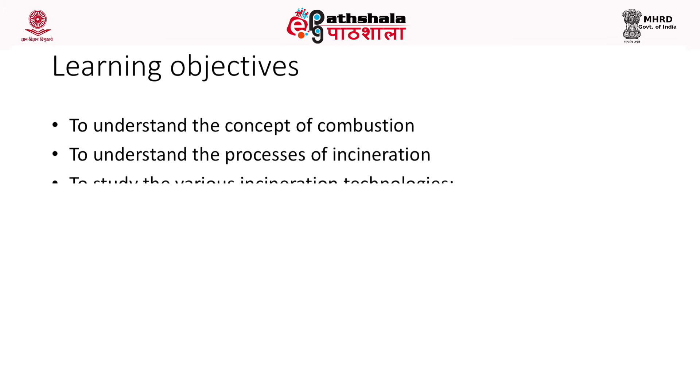So the learning objectives of this module include: first, to understand the concept of combustion, then to understand the process of incineration, to study the various incineration technologies, and finally we'll end up by studying the various advantages, disadvantages and applicability of incineration. Finally, we will also estimate the energy generation potential of various wastes.

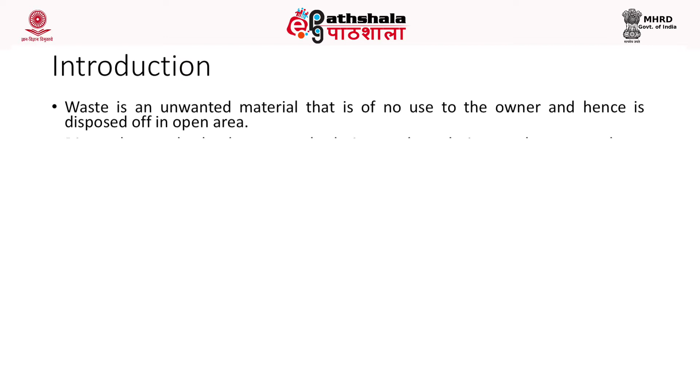Now, as I told you earlier, waste is an unwanted material that is of no use to the owner and hence is disposed of in an open area. Disposal into land or water bodies is just not a solution; it creates a huge problem for the environment, thereby ending up in a lot of environmental and health hazards. The polluter pays principle, which is proposed in the Environmental Protection Act, is for environmental protection, and this acts as a force for industries to treat the waste prior to disposal.

Thermal treatment is one option which uses a very high temperature to degrade or destroy the waste. They are designed to thermally degrade the waste and recover energy in the form of heat or electricity. Its main purpose is to reduce the impact of residual waste on the environment.

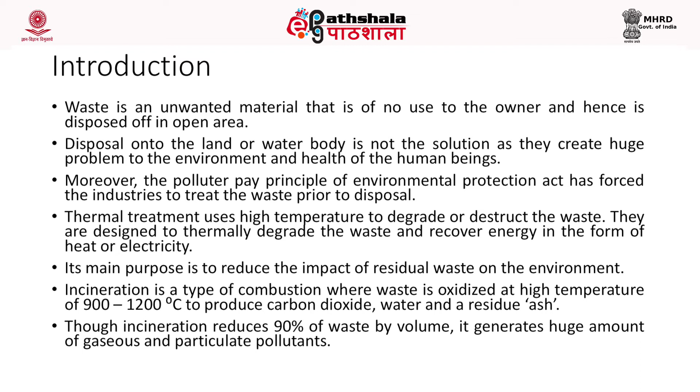So as I told you earlier, incineration is a type of combustion where the waste is oxidized in the presence of oxygen and a high temperature of around 900 to 1200 degrees Celsius, resulting in the production of carbon dioxide and water and a residue called ash. Though the incineration process reduces 90% of waste by volume, it generates a huge amount of gaseous and particulate pollutants. Now let's look into combustion and then we will study incineration.

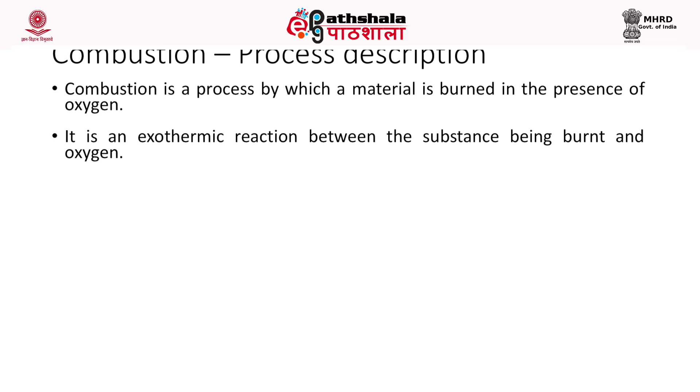Now what is combustion? Combustion is a process by which the material is burnt in the presence of oxygen. It is an exothermic reaction between the substance being burnt and oxygen. Combustion breaks down organic and inorganic substances into stable end products, carbon dioxide and water. The reactions occur between carbon and hydrogen and the oxygen present in air to form carbon dioxide and water.

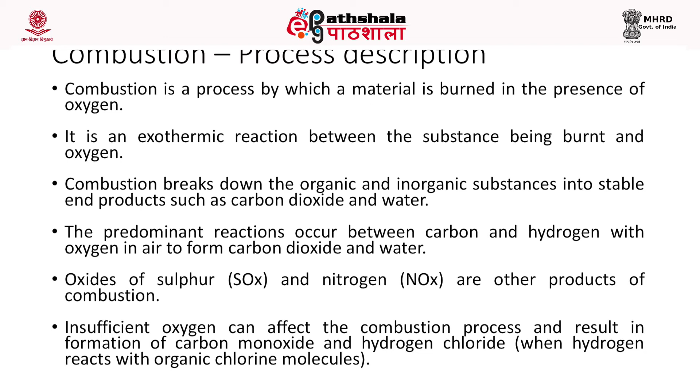In addition to carbon dioxide and water, oxides of sulfur and oxides of nitrogen are also released during this process. Insufficient oxygen can affect the combustion process and might result in the release of carbon monoxide, which is a very dangerous gas. As you all know, carbon monoxide combines with the hemoglobin of your blood and reduces the oxygen carrying capacity of blood, which can be fatal. Carbon monoxide is harmful, and hence to avoid its formation, you have to flush a sufficient amount of oxygen into the chamber.

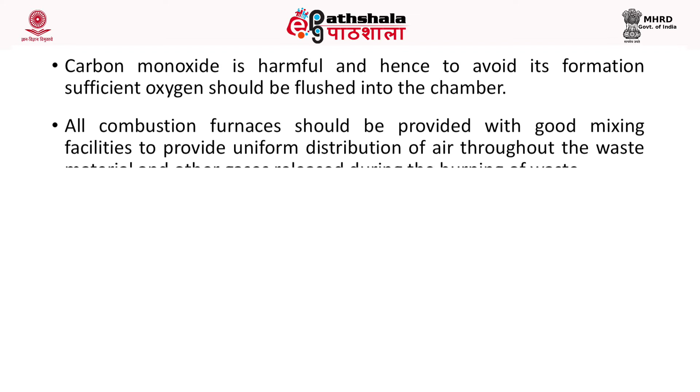All combustion furnaces should be provided with good mixing facilities to provide uniform distribution of air throughout the waste material and other gases released during the burning of waste.

At the end of combustion process, an incombustible particulate matter called bottom ash is left in the combustion chamber or the incinerator. Some amount of particulate matter is also emitted through the chimneys and this is termed as fly ash. So the particulate matter which is emitted outside the chamber along with the flue gas is termed as fly ash.

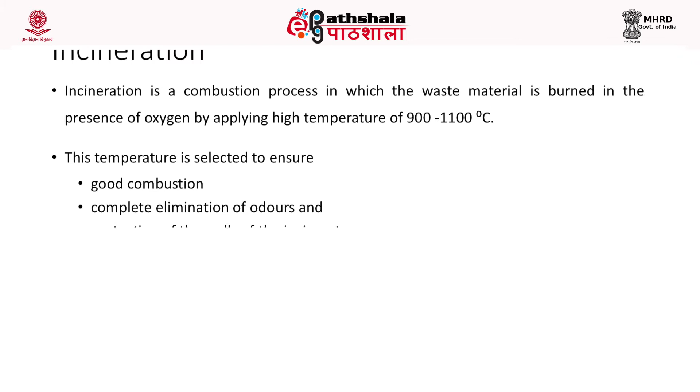Now incineration process is one of the best examples of combustion. As I told you earlier, incineration is a combustion process where the waste is burnt in the presence of oxygen at a very high temperature of about 900 to 1100 degrees Celsius. This temperature is selected, one, to ensure a good combustion, second, to eliminate the odor problems, and third, to protect the walls of the incinerator.

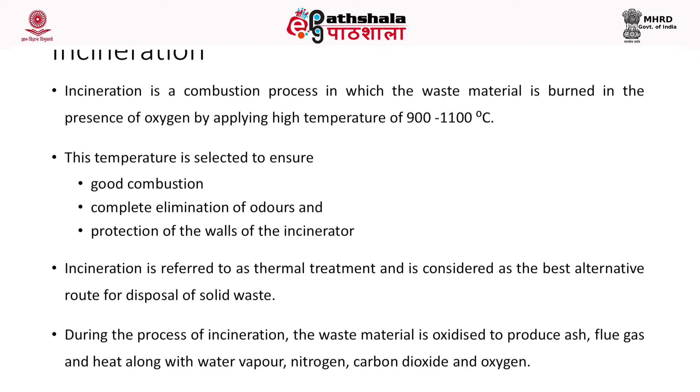Incineration is termed as a thermal treatment and is considered as a best alternative route for disposal of solid waste. During the process of incineration, the waste material is oxidized to produce ash, flue gas and heat along with water vapor, nitrogen, carbon dioxide and oxygen. In addition to carbon dioxide, other gases like carbon monoxide, hydrogen chloride, hydrogen fluoride, nitrogen oxides, oxides of sulfur, volatile organic carbon, dioxins, furans, PCBs are also produced depending upon the nature of waste and the availability of oxygen.

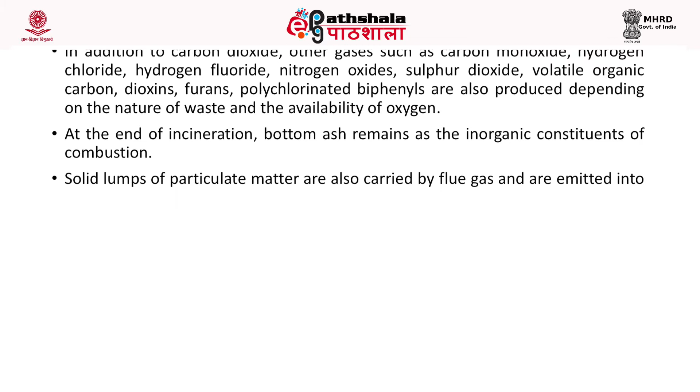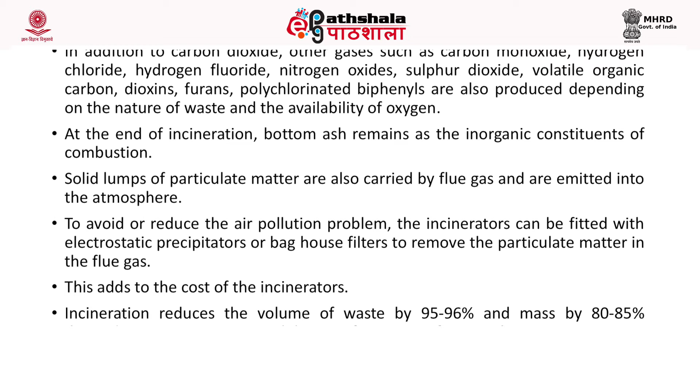At the end of incineration, bottom ash remains as the inorganic constituent of combustion. The solid lumps of particulate matter are also carried by flue gas and let out, which is called fly ash. In general, to avoid the emission of these particulate matter, that is the fly ash emissions, it is essential for a particular user to install an air pollution control device such as an electrostatic precipitator to remove these particulate matter so that they will not be released outside into the environment.

So, to avoid or reduce the air pollution problem, the incinerator can be fitted with electrostatic precipitators or baghouse filters to remove the particulate matter in the flue gas. And this adds to the cost of the incineration process. Incineration reduces the volume of waste by 95 to 96% and by mass it reduces by 80 to 85% depending upon the composition and the degree of recovery of materials.

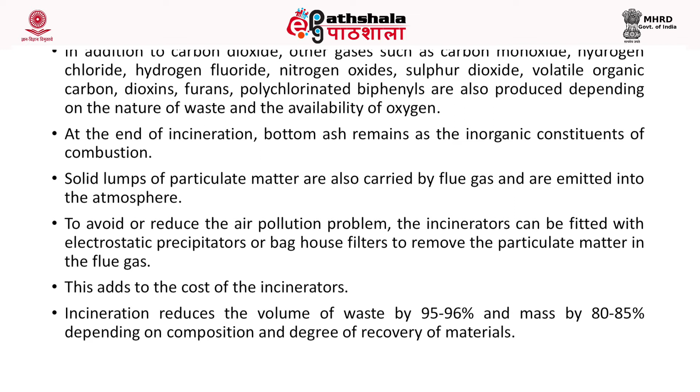At this high temperature, it also possesses an advantage of killing the pathogens. The pathogens and harmful organisms are killed during incineration and hence it is used for treating biomedical or clinical waste. Incineration process also removes harmful toxins. In recent times, modern incinerators are also used to recover energy from the heat generated during this combustion process.

Now, this energy can be used and converted into electricity. Since this advantage is associated with incinerators, they are categorized under systems where wealth can be recovered from waste. They are also called waste to energy processes. The heat that is generated from these incinerators is converted into electricity using steam turbines.

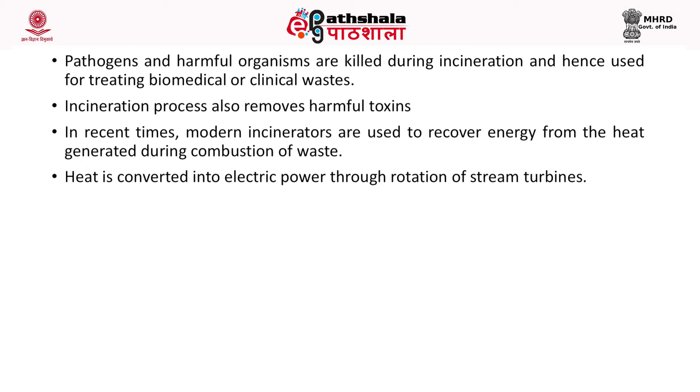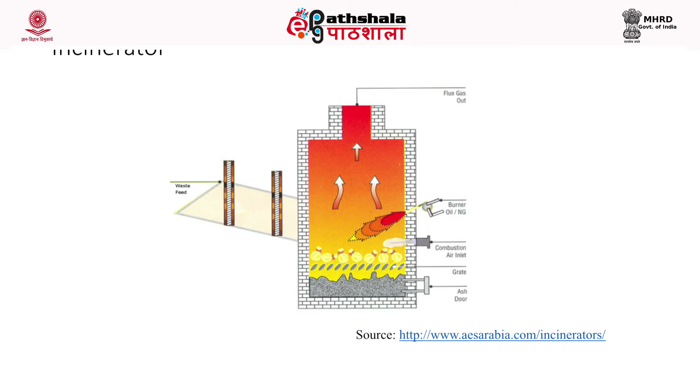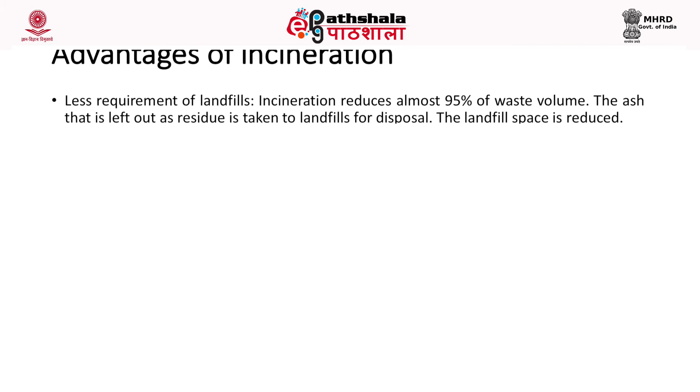Now what are the advantages of the incineration process? First, incineration requires less space in landfills. As incineration reduces almost 95% of waste volume, the ash that is left out as residue is taken to landfills for disposal. This reduces its space in the landfill.

Second, incineration can be carried out near the point of waste collection. That means at the source of generation itself, you can install an incinerator and continue with the process, because they are considered compact units. So incinerators are compact units and hence can be set up at the source of waste generation or in transfer stations. They can be used as decentralized systems.

Incineration results in substantial reduction of weight by up to 75% and by volume 90%. Also, it makes the product sterile. Waste is reduced into a biologically sterile ash product. At high temperatures of about 900 to 1100 degrees Celsius, the pathogens and other harmful organisms present in the waste are killed, and hence they are sterilized. The residue, that is the ash left after incineration, is hence termed as biologically stable.

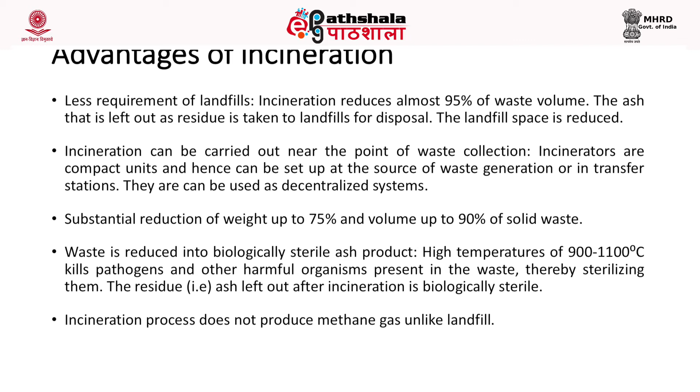The incineration process does not produce methane gas, unlike the landfills. As I mentioned earlier, it is also termed as a waste to energy process. The waste incineration can be a source of low cost energy to produce steam for electric power generation, industrial process heating, or hot water for district heating, thereby conserving primary fuel resource.

The bottom ash residue is considered as non-injurious and it can be used as a material recovery or as secondary aggregates in construction. It is the best practical environmental option for many of the hazardous waste like the highly flammable waste, volatile, toxic and infectious waste.

Now the disadvantages. First, the main disadvantage of the incineration process is the emissions from these incinerators. During the process of incineration, a lot of gases are being generated. These gases such as carbon dioxide, carbon monoxide, oxides of sulfur, and oxides of nitrogen are commonly emitted during the process of oxidation. They are serious air pollutants.

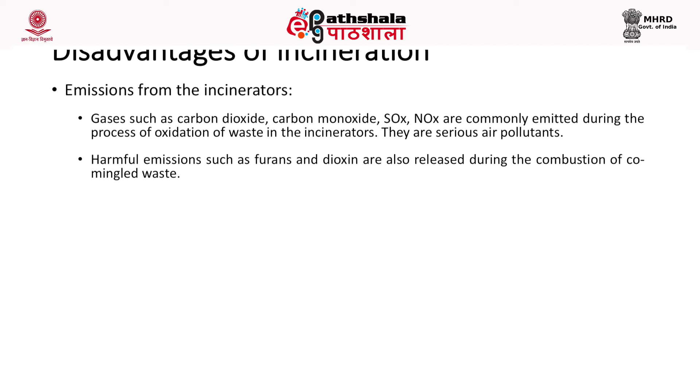Harmful emissions such as furans and dioxins are also released when you burn the commingled municipal waste. The fly ash also contributes to particulate air pollution. These air pollutants endanger human health and also the environment, and hence they require air pollution control devices.

So when you inhale this particulate matter, it can deposit in your respiratory system and it can lead to various breathing and respiratory problems. So that is a problem with this particulate matter, and the gases, as you all know, have some health effects. In addition to that, it also leads to a lot of environmental problems.

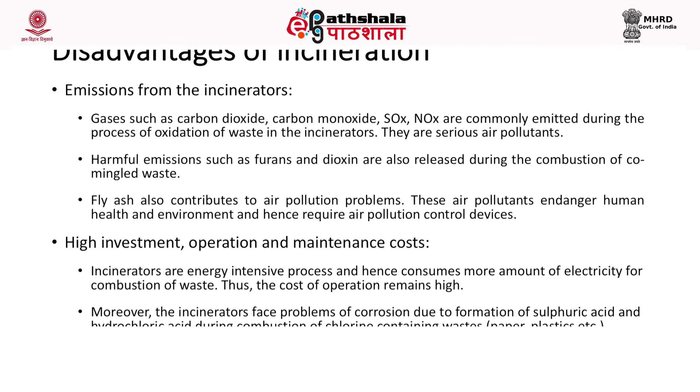The second disadvantage is that it involves a high investment, operation and maintenance cost. As incineration involves very high energy, that means a temperature range of around 900 to 1100 degrees Celsius, they are considered as energy intensive processes, and hence they consume more electricity for burning the waste. Thus, the cost of operation remains high.

Moreover, the incinerators face problems of corrosion due to formation of sulfuric acid and hydrochloric acid during combustion. The emission pipes too get abraded due to the deposition of particulate matter, which becomes hard. These factors increase the cost of maintenance of these incinerators. A high capital investment cost is also involved for constructing these incinerators.

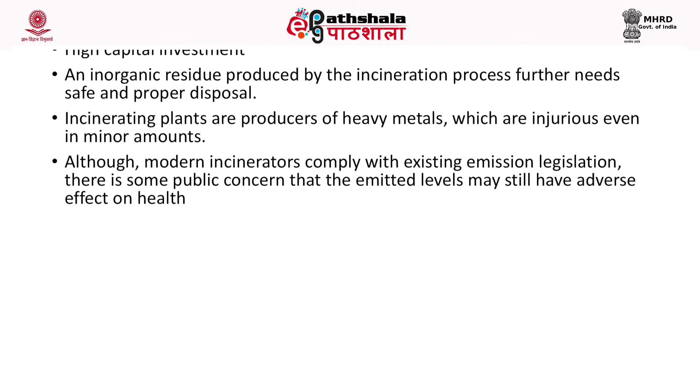An inorganic residue produced by the incineration process further needs safe and proper disposal. The incineration plants are producers of a lot of heavy metals which are injurious even in minor amounts. Although modern incinerators comply with the existing legislation or laws, there is some public concern that the emitted levels may still have adverse effects on health.

Incineration is designed on the basis of a certain calorific value of waste. Removal of materials like paper and plastics for recycling may reduce the overall calorific value and may affect the incinerator performance. Local communities have always opposed the presence of these incinerators in their locality due to the problems associated with the gaseous and particulate emissions. They also require skilled operators, which will again add to the operation cost.

Now, when can this incineration process be applied? Incineration can be applied only if the following criteria are fulfilled. First, it can be used in places where waste management has been practiced for a number of years. Second, at least 50,000 metric tons of waste should be available per year. Also, you should take care of the calorific value of waste, because it is very important to achieve efficient incineration.

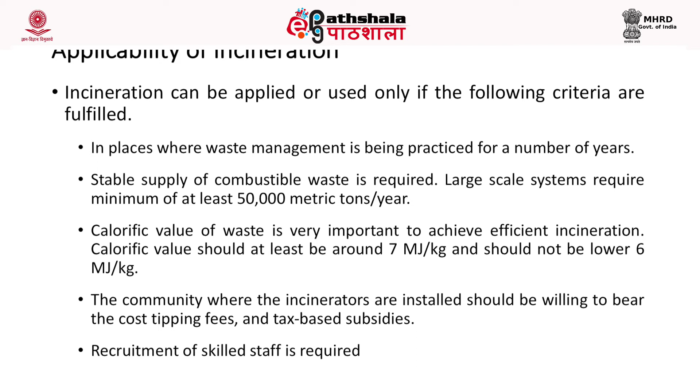The calorific value should be at least 7 megajoules per kg, and it should not be lower than 6 megajoules per kg. The community where the incinerators are installed should be willing to bear the cost, tipping fees and the tax-based subsidies. The recruitment of skilled staff is also required if you have to go for an incinerator as an option.

Now, let's look into the various systems which are available for the incineration process. An incinerator is designed to maximize the combustion efficiency of waste and heat output. It should focus on minimizing emissions by balancing the oxygen and time, temperature and turbulence. The 3 T's, that is time, temperature and turbulence, should be maintained throughout the process. On the basis of the capacity, nature of waste to be combusted and the type of system, incinerators are classified into the following types.

The mass burn incinerator, modular incinerator, fluidized incinerator, starved air incinerator, refuse derived fuel and rotary kiln incinerators.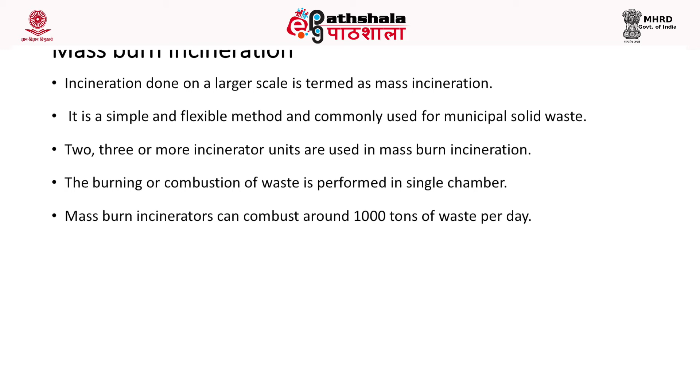Mass burn incineration: incineration done on a large scale is termed mass incineration. It is a simple and flexible method, most commonly used for municipal solid waste. Around 2 to 3 or more incinerator units are used, and the combustion of waste is performed in a single chamber that can combust around 1000 tons of waste per day.

The process goes like this: the pre-processed, segregated waste is brought through trucks to the tipping floor. After the waste is tipped onto the floor, it is pushed into the pit by a bulldozer, then fed into the incineration chamber through a chute and grate system.

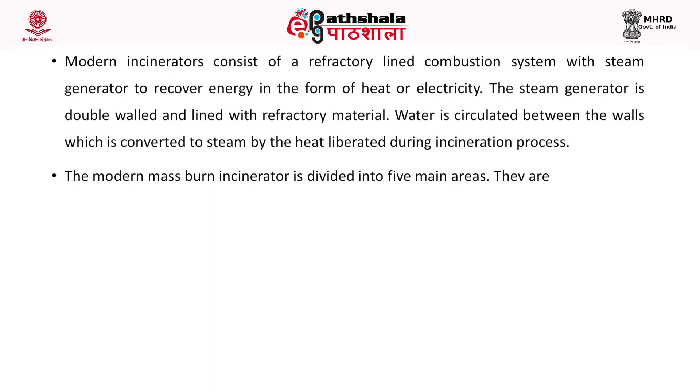Since mass burn incineration combusts huge amounts of waste, these units are built to recover energy. Modern incinerators consist of a refractory-lined combustion system with a steam generator to recover energy as heat or electricity. The steam generator is generally double-walled and lined with refractory material, with water circulated between the walls that is converted to steam by the heat liberated during incineration.

The modern mass burn incinerator is divided into 5 main areas: a waste feeding system, a furnace, heat recovery, emission control, and an energy recovery system.

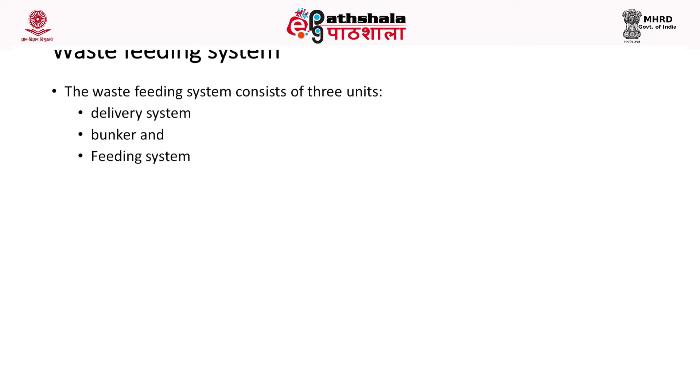Waste feeding system: this consists of 3 units - a delivery system, a bunker system, and a feeding system. The waste collection vehicles entering a processing site are weighed at the entrance on arrival and departure to determine the charge for disposal and incinerator operation.

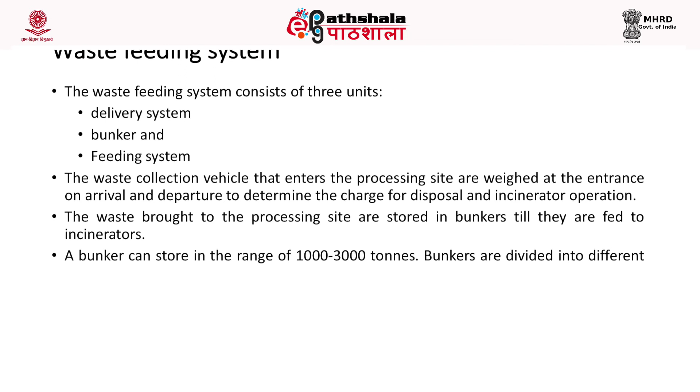The waste brought to the processing site is stored in bunkers until fed into the incinerators. Bunkers generally act as temporary storage sites, able to store waste in the range of 1000 to 3000 tons. They are divided into different sections for storing waste of different calorific values. Long-term storage leads to rotting and odor problems, so hazardous waste and bulky items are separated before being stored in bunkers.

The feeder consists of a steel hopper through which waste is fed into the incinerator, passing through the grate by a hydraulic ram. To avoid air leakage into the furnace, the hoppers are half filled with waste, and hydraulic shutters are used to seal the hoppers at the furnace entrance to prevent fire from burning back. Additionally, the feed chute can be water-cooled or refractory lined to prevent fire.

Furnace: here the waste is fed into the incinerator through a controlled ram, combusting around 50 tons of waste per hour. Sometimes multiple furnaces are used, which can act as a standby during repair and maintenance. Auxiliary burners are used to increase the furnace temperature, especially during startup.

Three stages of incineration occur inside the furnace: drying and devolatilization, combustion of volatiles and soot, and combustion of solid carbonaceous residue. In drying and devolatilization, once the waste enters the system, moisture is removed as it is preheated.

Then the organic matter undergoes thermal decomposition, generating volatile organic matter such as hydrogen, carbon monoxide, methane, ethane, and other high molecular weight hydrocarbons, along with combustible gases and vapors. Devolatilization occurs at temperatures of 200 to 750 degrees Celsius and begins at the end of the drying phase, releasing volatiles at 425 to 550 degrees Celsius depending on the nature and physical state of the waste.

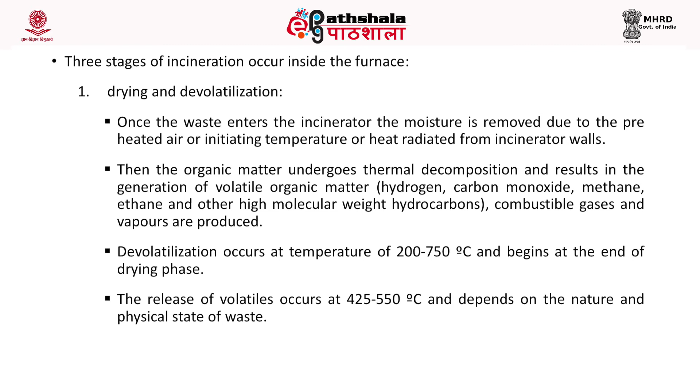In the combustion of volatiles and soot, the volatiles released are burned in the combustion chamber located above the grate. High temperature, complete mixing, excess air, and long residence time are required for complete combustion. The gases are subjected to 850 degrees Celsius for only 2 seconds to achieve complete combustion of volatiles. Temperatures above 1200 degrees Celsius should be avoided to prevent slag formation from fusion of ash residue. The gases must be held in the combustion chamber for a minimum of 2 to 4 seconds to achieve complete combustion.

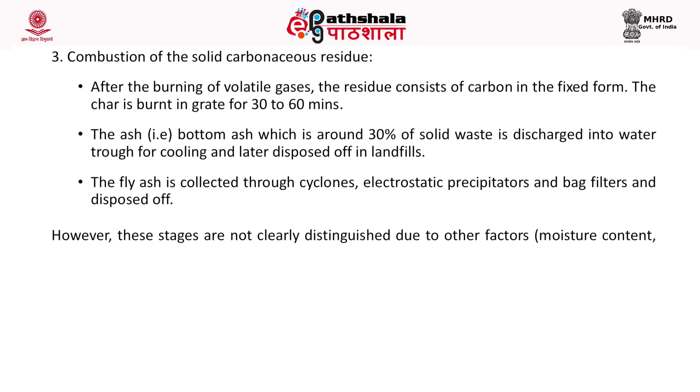In the combustion of solid carbonaceous residue, once the volatile gases are burnt, the residue consists only of carbon in the fixed form. The char is burnt in a grate for 30 to 60 minutes. The bottom ash, around 30% of solid waste, is discharged into a water trough for cooling, then collected and disposed of in landfills. The fly ash, released through the flue gas, is collected through cyclone separators, electrostatic precipitators and bag filters, and then disposed of.

However, these stages are not clearly distinguished due to factors involved, such as moisture content, thermal degradation, volatile composition and ignition temperature.

This image shows how energy can be recovered from an incinerator. On the left side, a truck drops off the waste into the tipping hall. From the tipping hall, through a crane, the waste is carried and dropped into the incinerator. It is slowly burnt, and the bottom ash is collected through a conveyor belt and taken by truck to a landfill.

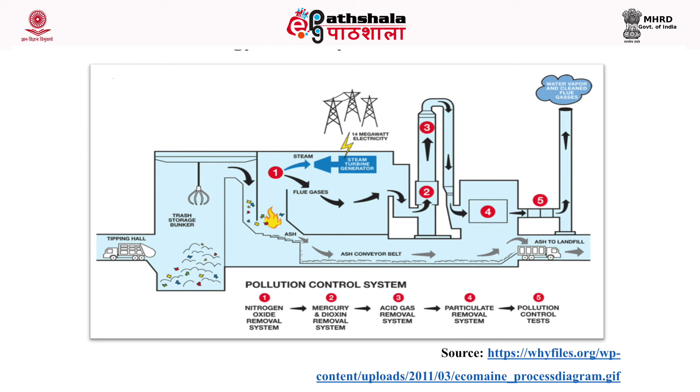The heat generated is taken up and it heats the water stored there, forming steam. The steam is taken up to rotate the turbines, from which electricity is generated.

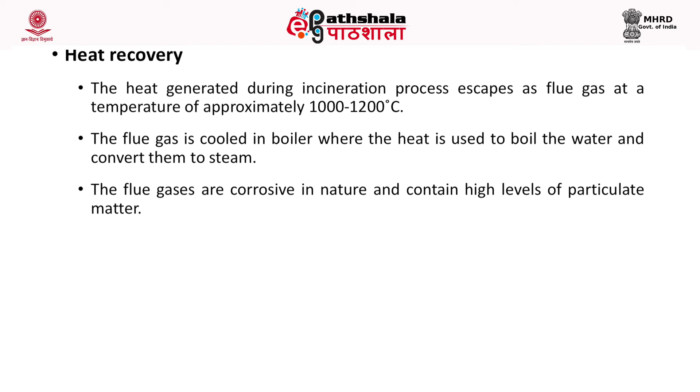Next is heat recovery. The heat generated during the incineration process escapes as flue gas at a temperature of approximately 1000 to 1200 degrees Celsius. The flue gas is cooled in boilers where the heat is used to boil the water and convert it to steam. The flue gas is corrosive in nature and contains a high level of particulate matter.

Emissions such as flue gas, particulate matter, and other acid gases such as hydrogen chloride, hydrogen fluoride, oxides of sulfur and heavy metals are controlled using air pollution control devices like scrubbers, absorption units, cyclones, separators, bag filters and electrostatic precipitators.

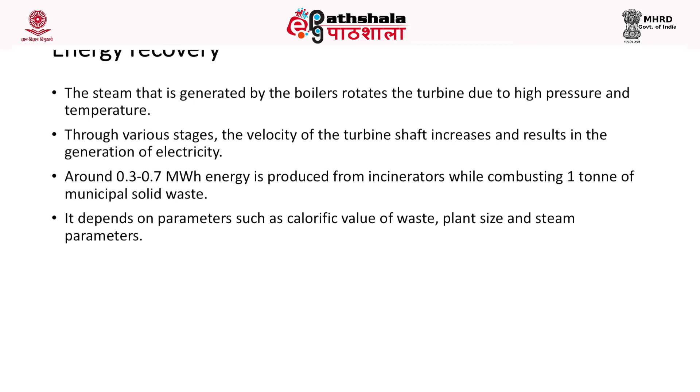As mentioned earlier, for energy recovery, the steam generated by the boilers rotates the turbine due to high pressure and temperature. Through various stages, the velocity of the turbine shaft increases, resulting in the generation of electricity. Around 0.3 to 0.7 megawatt-hour of energy is produced from incinerators while combusting 1 ton of municipal solid waste, depending on parameters like calorific value, plant size and steam parameters.

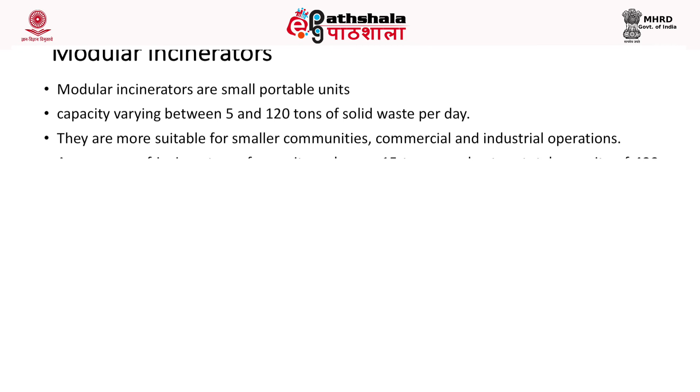The second type of incinerator is the modular incinerator. These are small portable units with capacity varying between 5 to 120 tons of solid waste per day. They are more suitable for smaller communities, commercial operations and industrial operations, and you can also add 2 or 3 units along with existing units.

A sequence of incinerators with capacity as low as 15 tons per day, up to a total capacity of 400 tons per day, can be considered or constructed as part of modular incinerators. Addition or detachment of units is possible. Modular incinerators are also prefabricated units and can be constructed within a short period of time. Their construction cost is much less compared to mass burn incinerators.

A modular incinerator consists of a refractory-lined furnace and a waste heat boiler system, with 2 combustion chambers. Gas generated in the first primary chamber is fed to the afterburner or secondary chamber to achieve complete combustion and minimize emissions. Most modular units produce steam as the sole energy product and are operated in both batch and continuous mode.

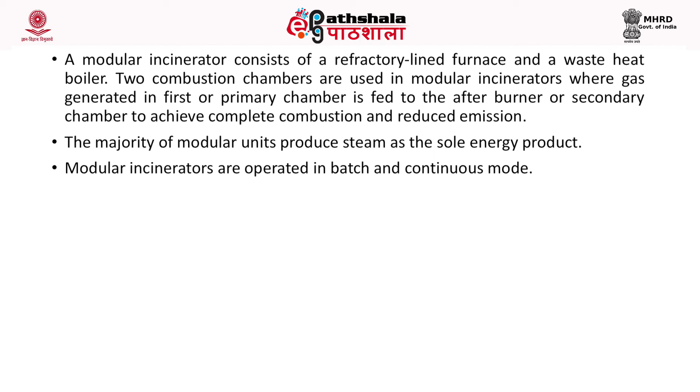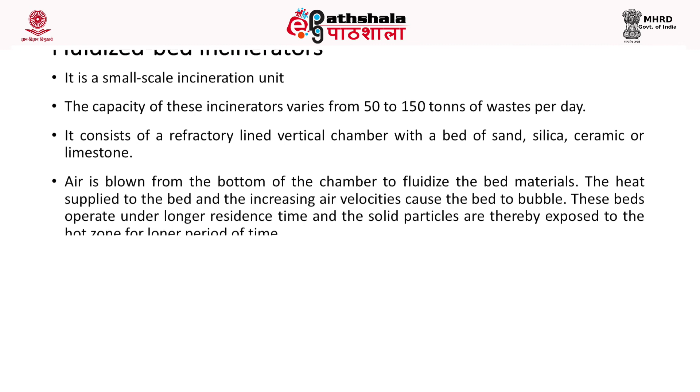The next type is the fluidized bed incinerator, also a small scale unit. Its capacity varies from 50 to 150 tons of waste per day, and it consists of a refractory-lined vertical chamber with a bed of silica, sand, ceramic or limestone. Air is blown from the bottom of the chamber to fluidize the bed material. The heat supplied to the bed and increasing air velocities cause the bed to bubble. These beds operate under long residence time.

The solid particles are thereby exposed to the hot zone for a long period of time. The turbulence generated within the chamber causes the solid material to flow above. The cyclone separator is fixed to collect and recirculate the material back to the bed. The advantage of doing so is better combustion with minimized air emissions due to high burnout.

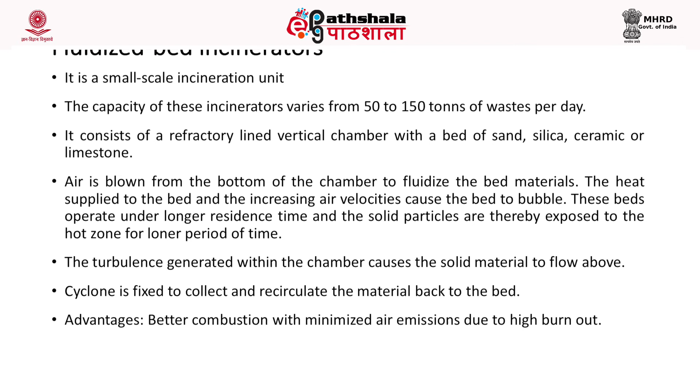To achieve better combustion, the bed material should also be preheated. Also, you can shred the waste and add it, which will also increase the combustion efficiency. The dispersion of incoming waste and sufficient residence time are major reasons for complete combustion in fluidized bed incinerators.

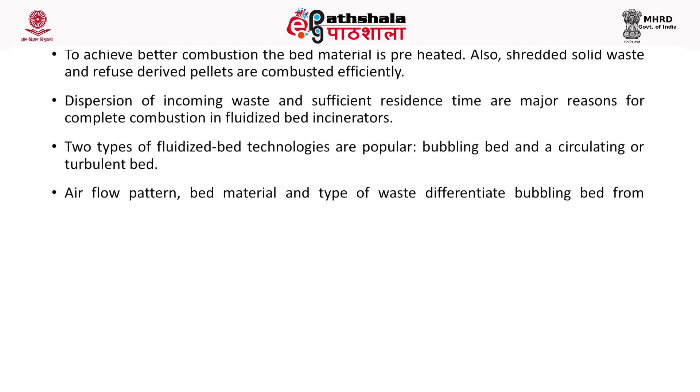There are two types of fluidized bed technologies: one is the bubbling bed, and the other is the circulating or turbulent bed. The airflow pattern, bed material, and the type of waste differentiate the bubbling bed and the circulating bed incinerators.

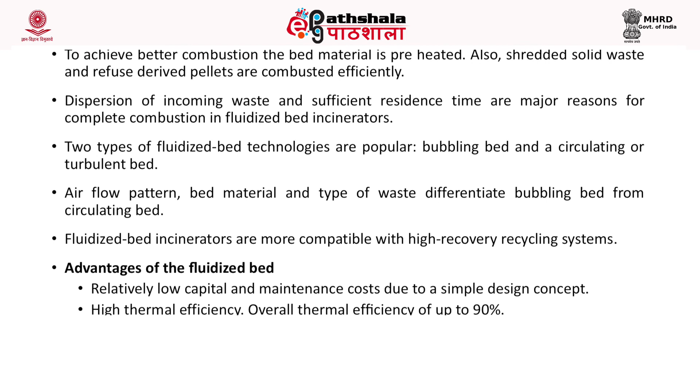Fluidized bed incinerators are more compatible with high recovery recycling systems. Some of the advantages and disadvantages of the fluidized bed system include: the advantages are they are relatively low in capital and maintenance costs because of their simple design aspect. They have a very high thermal efficiency of around 90%. They are very flexible, consistent, and have a very high energy conversion efficiency.

Also, they produce less ash, resulting in lower emissions. They are suitable for handling both solid as well as liquid waste, either separately or in combination. They also reduce toxic and other dangerous substances, and they have a multi-fuel input.

The disadvantages are it is not so common, nor is it a completely tested technology. It requires pretreatment, and stringent requirements for size, calorific value, and ash content are required. Relatively strict demand on the size and composition of waste is essential.

The next type is the refuse derived fuel. The refuse derived fuel, or RDF, refers to solid waste that is mechanically processed so that it can be used as a fuel. RDF is easily stored and transported for use anywhere in the world.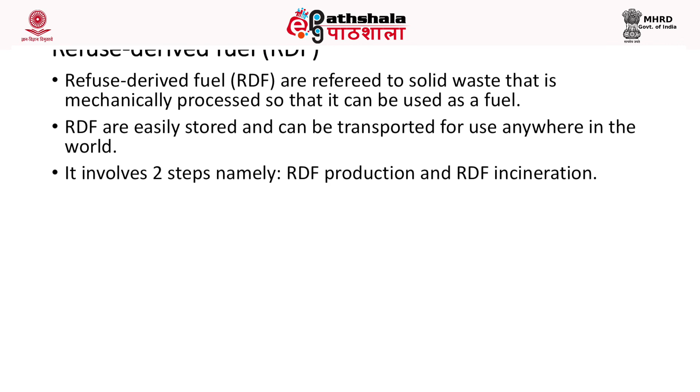It is prepared in two steps: one is RDF production, and the other is RDF incineration. The waste material is segregated, shredded, and then pelletized.

How is it done? The waste is dropped onto the tipping floor, and through the conveyor belt it is carried to a segregation or sorting site. The waste is carried through a conveyor belt on top of which a strong magnet is passed to separate the ferrous metals. After the basic screening, the waste is then made into small pellets by pelletizing units.

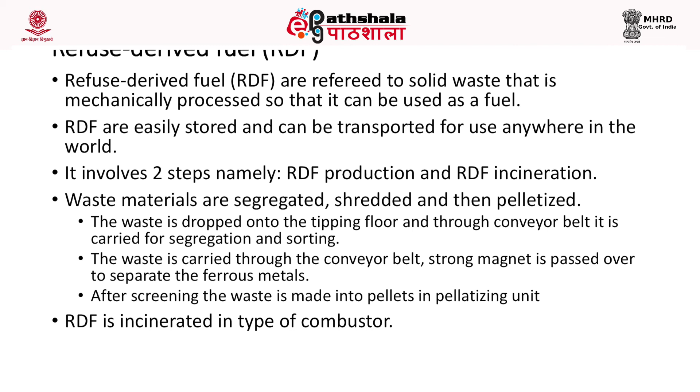Now, RDF is incinerated in combustors. There are two types of RDF systems: one is the simplified system, and the other is the shred and burn system.

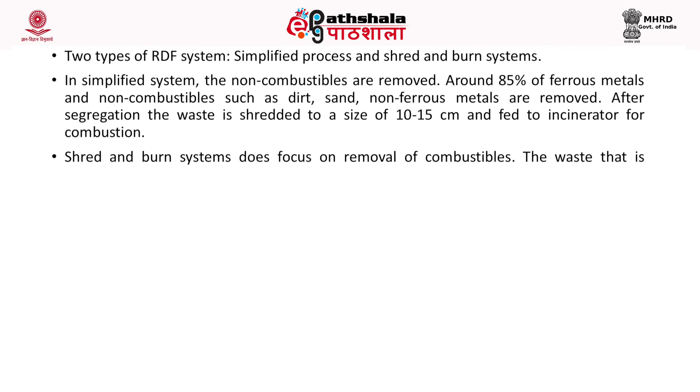In a simplified system, the non-combustibles are removed, about 85% of ferrous metals, and non-combustibles such as dirt, sand, and non-ferrous metals are removed and segregated. The segregated waste is then shredded to a size of 10 to 15 centimeters, and then fed into incinerators.

In a shred and burn type, they do not focus on removal of combustibles. The waste that is dropped onto the tipping floor is shredded and then directly fed into the incinerator without any segregation. This type of RDF production is considered easy and simplest because it requires minimum processing.

But the ash that comes out of the incinerator can be subjected to a magnet for the removal of non-ferrous metals. Depending on the combustibles, the ash content will also vary. The higher the combustibles, the lower will be the ash content.

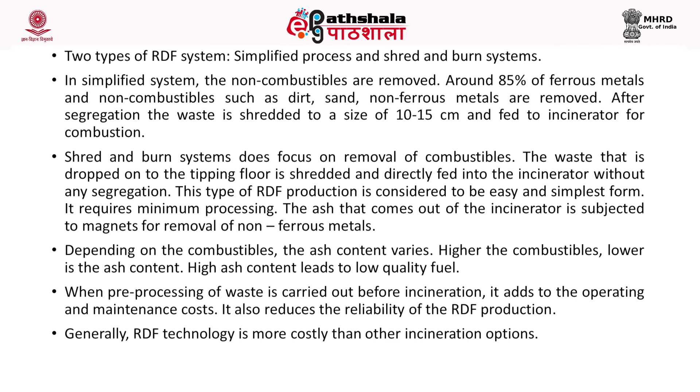High ash content will always lead to a low quality fuel. So when pre-processing of waste is carried out before incineration, it will add to the operating and maintenance cost. It will also reduce the reliability of the RDF production process. Generally, RDF technology is more costly than other incineration processes. The next type of incinerator is starved air incinerators.

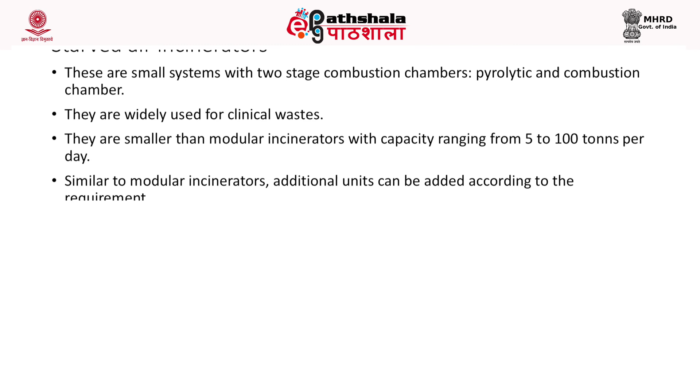Again, it is a small scale system with two combustion chambers, pyrolytic and combustion chamber. They are widely used for clinical waste, that is biomedical waste. These systems are smaller than modular incinerators and have a capacity ranging from 5 to 100 tons per day. Similar to modular incinerators, additional units can be added according to the requirement.

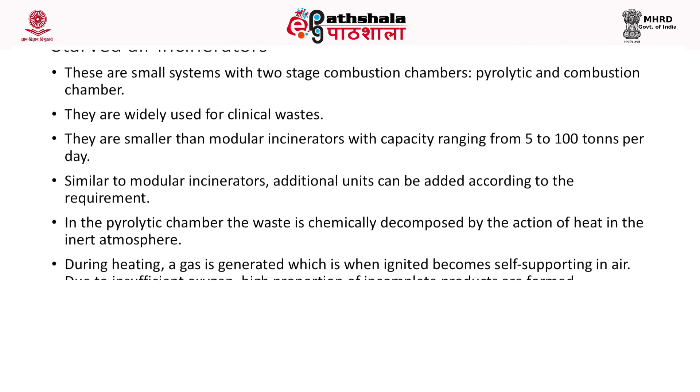In a pyrolytic chamber, the waste is chemically decomposed by the action of heat in an inert atmosphere. During heat, a gas is generated which, when ignited, becomes self-supporting in air. Due to insufficient oxygen, a high proportion of incomplete combustion products are formed. The carbon monoxide and hydrogen that is formed is sent to the second combustion chamber where they are subjected to 200% excess air. This increases the temperature of the chamber and ends up combusting the waste, converting carbon monoxide and hydrogen into carbon dioxide.

The dioxins and PCBs are also broken down in the second chamber, and during this process NOx is not formed. In the second chamber, turbulence and mixing occurs due to gas that enters from the first chamber.

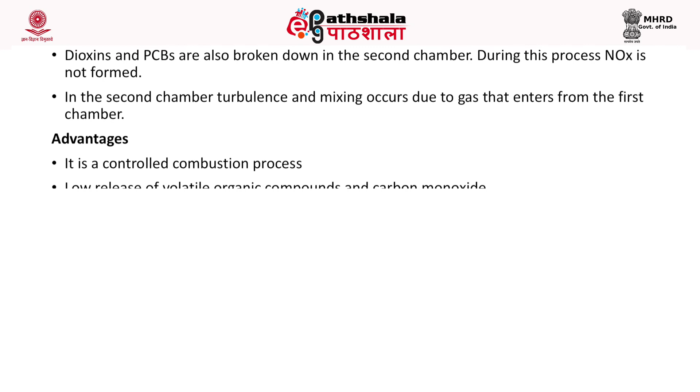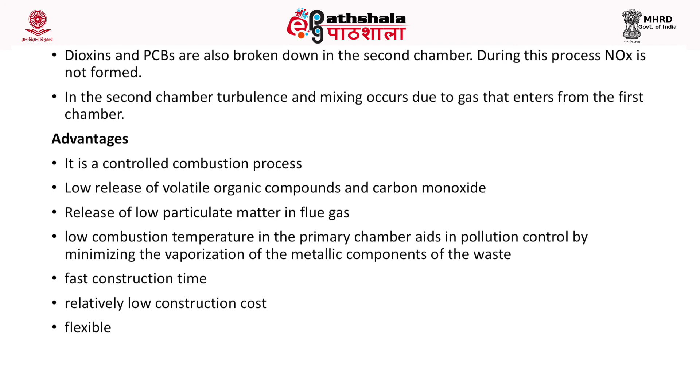The advantages of this process include: it is a controlled combustion process, it releases less volatile organic compounds and carbon monoxide, and also a low level of particulate matter is released in the flue gas. Low combustion temperature in the primary chamber aids in pollution control by minimizing the vaporization of metallic components of the waste. The construction time is very less, it can be constructed very fast, and they have a relatively low construction cost, so they are also flexible systems.

Looking into the disadvantages: they are of limited size, they show a lower thermal efficiency, they require a very high maintenance cost, and a shorter equipment life.

When you are using the incineration process with an objective of generating energy from the incineration process, it is essential for us to know the energy content of waste. Now this section will help you in calculating the energy content of each waste.

The energy content of waste can be calculated using the values of ultimate analysis of waste. Ultimate analysis, which we have already studied in the previous module, involves the analysis of the carbon, hydrogen, sulfur, and oxygen percentage of waste. The energy content of waste can be expressed as either kilojoules per kg or BTU per LB.

Energy content can be calculated using Dulong's formula, given as: 145.4C + 620(H - 1/8 O) + 41S, where S denotes sulfur, C denotes carbon, H denotes hydrogen, and O denotes oxygen. All these are taken as percentage by dry weight basis.

You can convert the value which you get in BTU per LB, and if you multiply the value with 2.326, you can get the energy content in terms of kilojoules per kg.

This table shows you the ultimate analysis of combustible waste. The types of waste are listed in the left column: food waste, paper, cardboard, plastic, textile, rubber, and so on. On the right side you can find the percentage of carbon, hydrogen, oxygen, nitrogen, sulfur, and ash for each particular waste.

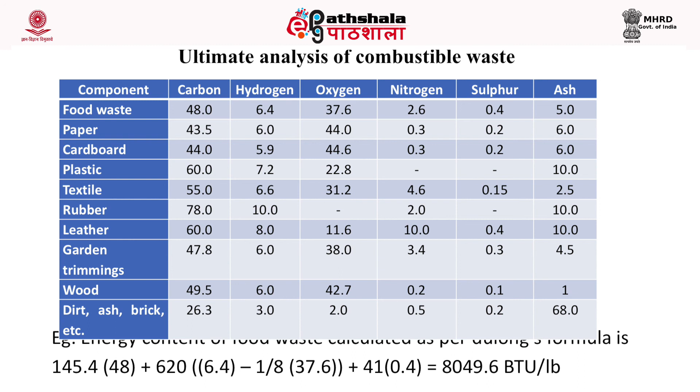An example is provided here for calculating the energy content of food waste. Based on the ultimate analysis, you can see the food waste possesses an energy content of around 8049.6 BTU per LB.

To summarize, at the end of this module we have studied about combustion: what is a combustion process, how the combustion process occurs in the presence of oxygen, and how high temperature and oxygen can break down or thermally destruct the waste into gaseous products and a solid residue called ash.

Incineration is a type of combustion process where the waste is subjected to a temperature of around 900 to 1200 degrees Celsius in the presence of oxygen. It results in the release of gaseous products and a solid residue called bottom ash.

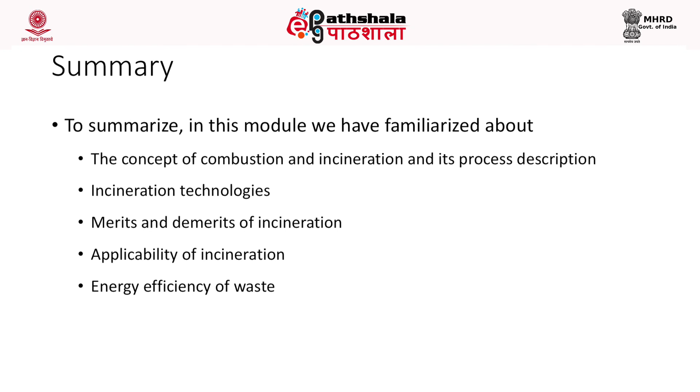Some amount of solid residue is also released along with the flue gas, called fly ash, and to avoid their emission into the external environment, you can connect air pollution control devices which will minimize particulate as well as gaseous emissions.

We also looked into the various advantages and disadvantages of the incineration process. We discussed the various incineration technologies like starved air incinerators, mass burn modular incinerators, and refuse derived fuel incinerators, along with the advantages and disadvantages of each. We also studied about the energy content, how to calculate the energy content of waste from the ultimate analysis of waste, and listed out the various conditions where incineration technologies can be used.